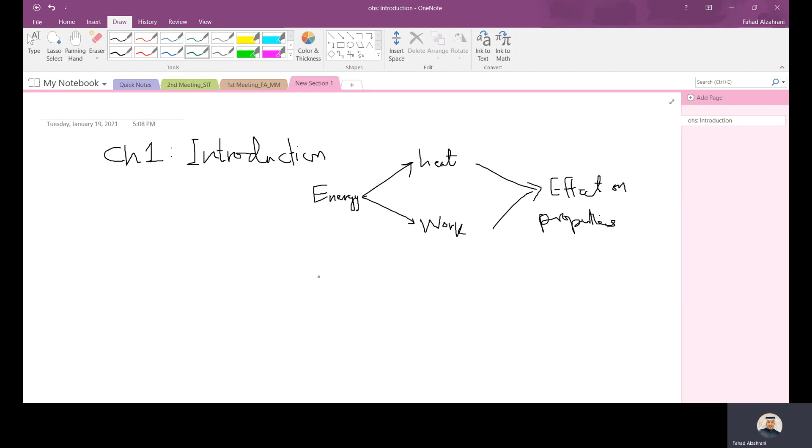Today we'll talk about a few concepts that are also important in thermodynamics. If you remember the example of the hot coffee we talked about before, let's say I have this coffee, and let's say it's hot.

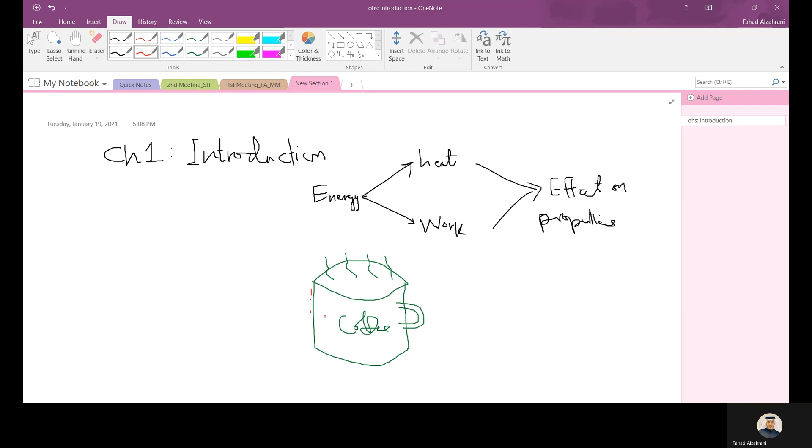Let's say I'm interested in understanding how the heat transfers from the coffee to the surrounding. I want to understand how the properties of the coffee change from state 1 to state 2, or from one point to the other point. So this coffee, in this case, is what we call my system.

A system is basically whatever you are interested in to study. I'm interested in the coffee, so this is my system. But what is the thing outside the coffee, away from the coffee? Let's assume this coffee is hot at 80 degrees Celsius, and outside, the ambient temperature here is 25 degrees Celsius. So what do we call this?

Outside the system, this is what we call the surrounding. This is the other concept in this case.

What separates the surrounding from the system, there is a line that separates the system from the surrounding. This line, or in this case the dashed lines, is what we call the system boundary. So the boundary is what separates the system from its surrounding.

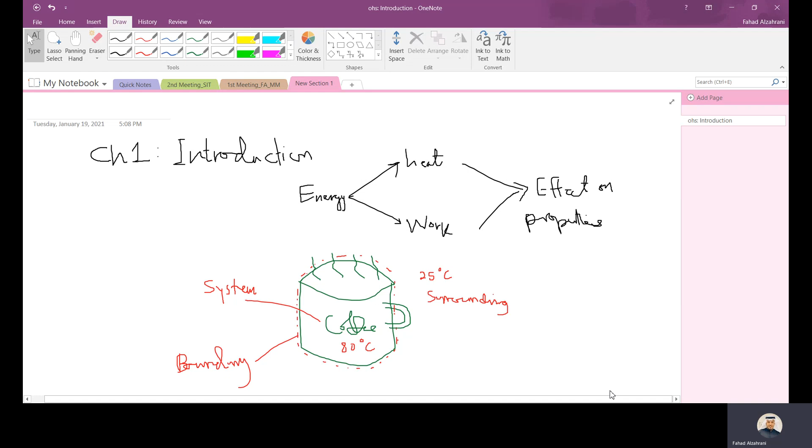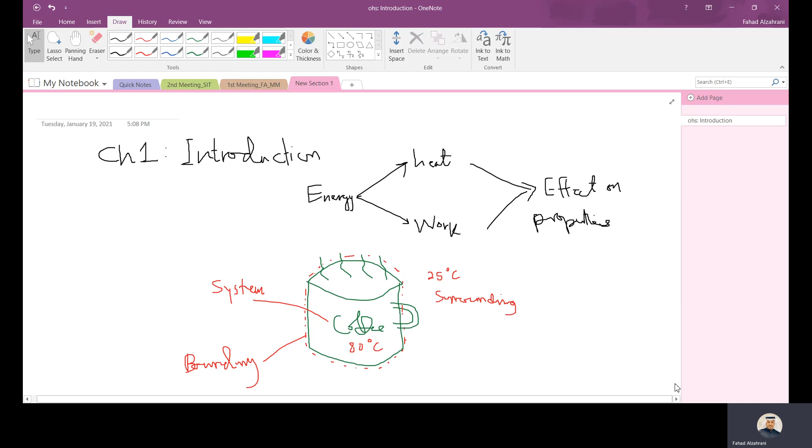The other concept is the type of system. If you notice here, the mass of the coffee is fixed.

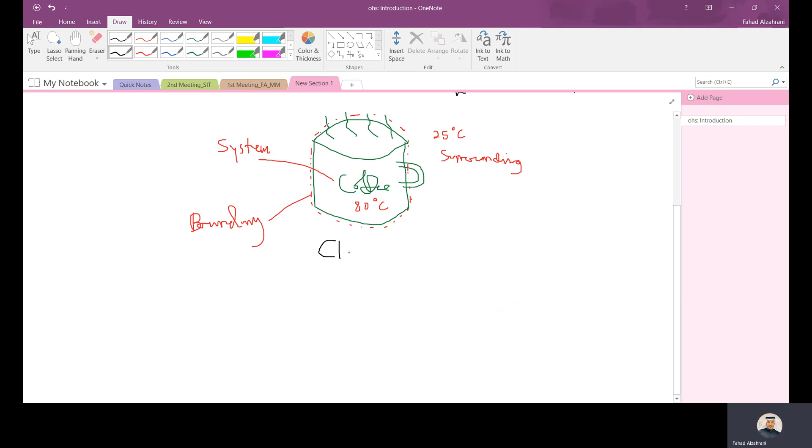I have coffee inside the cup, and this cup's dimension is fixed, and the mass of the coffee is fixed, and there is energy transfer by heat. So this fixed mass system is what we call a closed system.

Another name for it is control mass. Control mass means the mass is fixed, is controlled, it's not changing. So the mass of the system is not changing through the process.

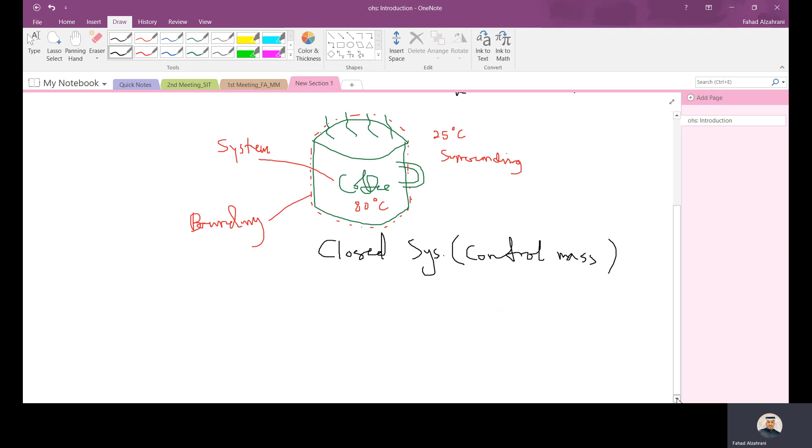Since we have a closed system, on the other side we have another type of system, which we call an open system. So what is an example of an open system?

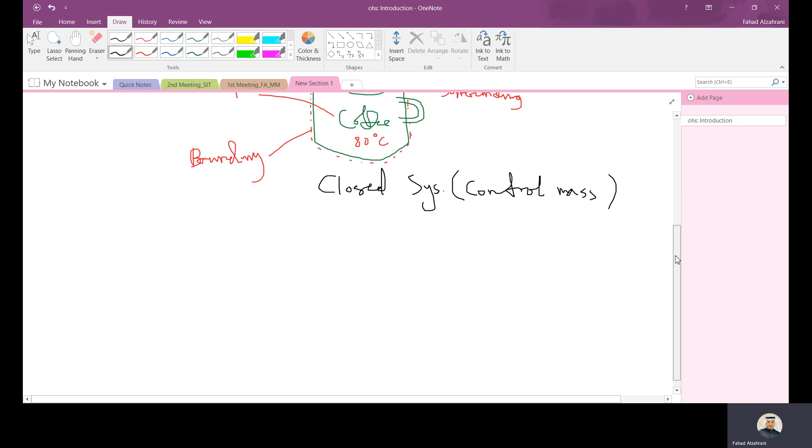Imagine I have a water pump, like the dynamo you all know at home. It takes water from the reservoir, from the tank, and pushes it to the top of the house. This is called a water pump.

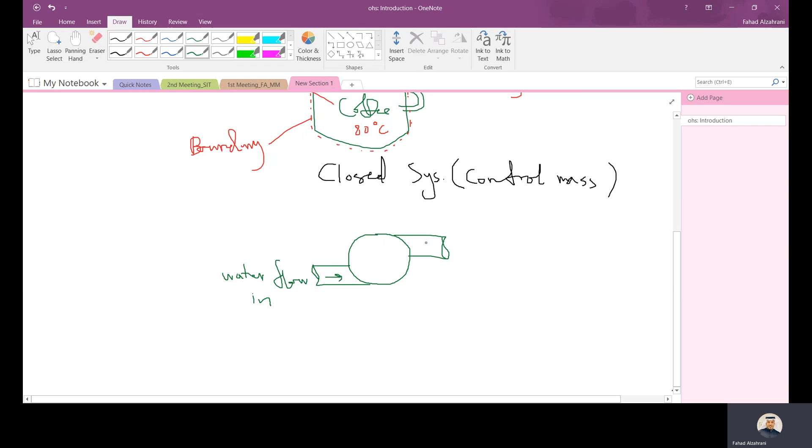It takes water from the inlet, so this is water flow in, and this is water flow out.

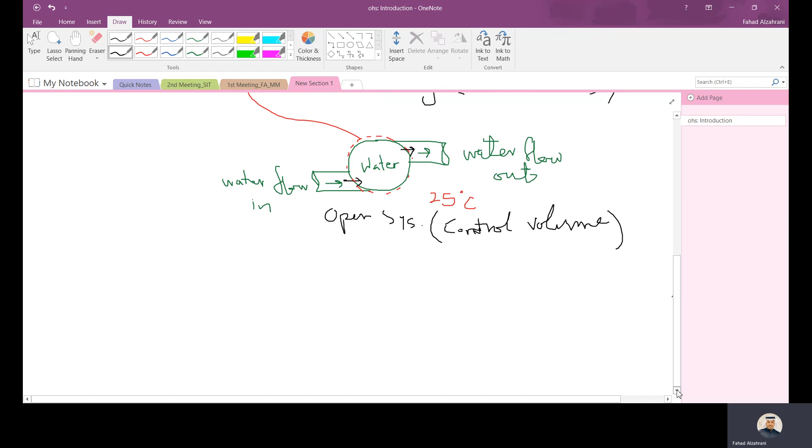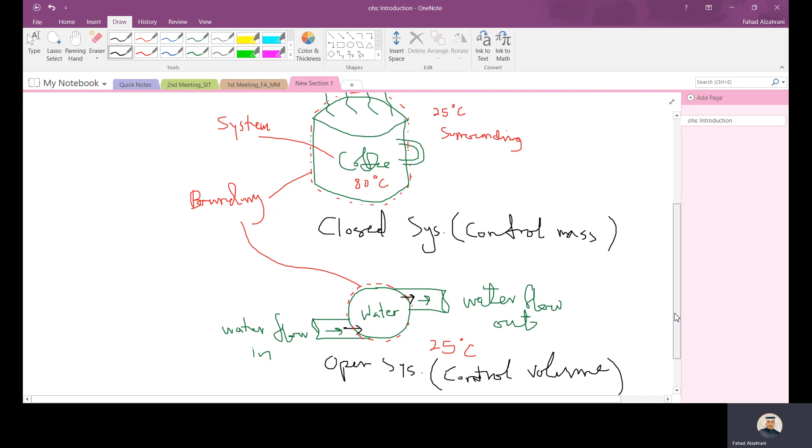So what did we learn so far? We learned what is a system, what is a surrounding, what is a boundary. We learned that there are two different types of system: we have a closed system, called control mass, where the mass does not cross the system boundary, and we have an open system, called control volume, where the mass crosses the system boundary.

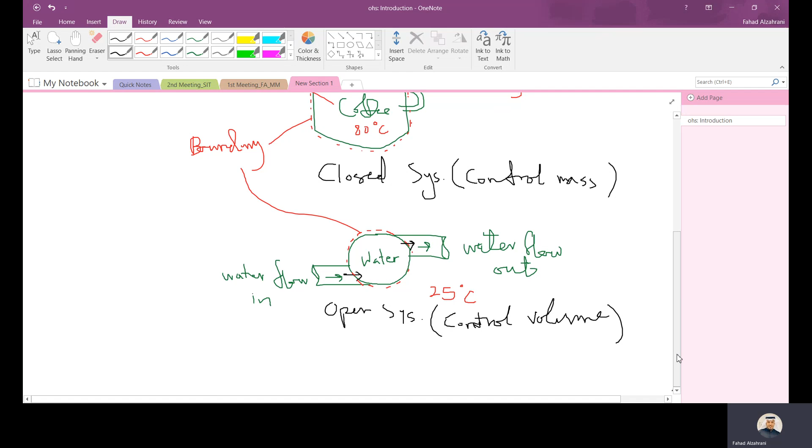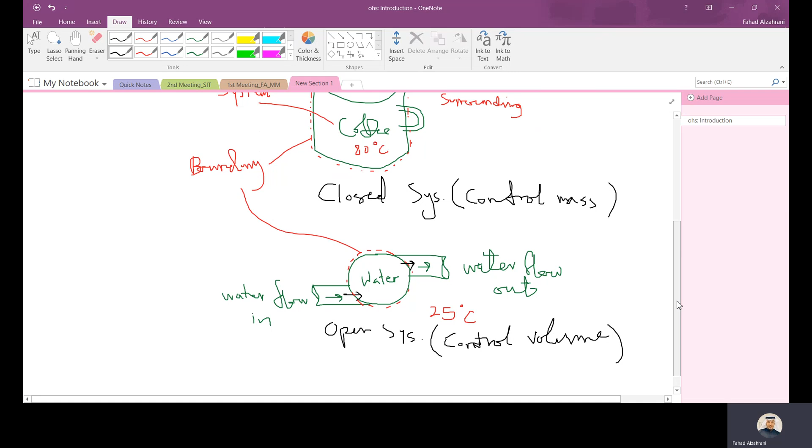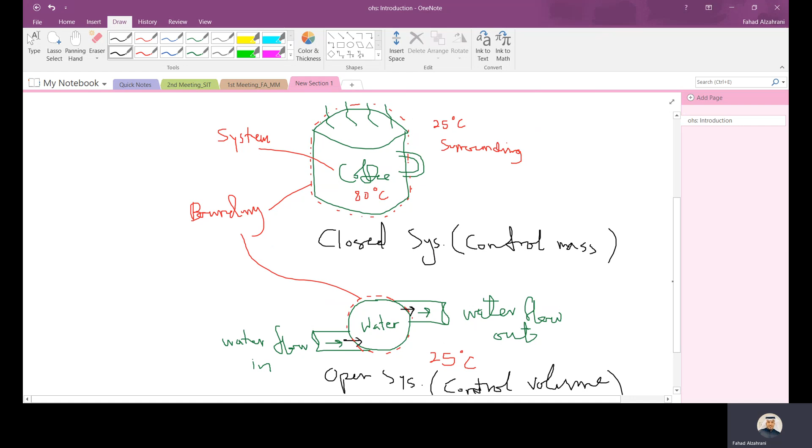Similarly to the system, we also have different types of boundary. If you notice, in these two examples, my boundary here - the dimensions or volume of the system itself has certain dimensions, and if we draw the system boundary, we notice that it is not changing. So the system boundary is not changing. However, we could have cases or applications where the boundary itself is a moving boundary.

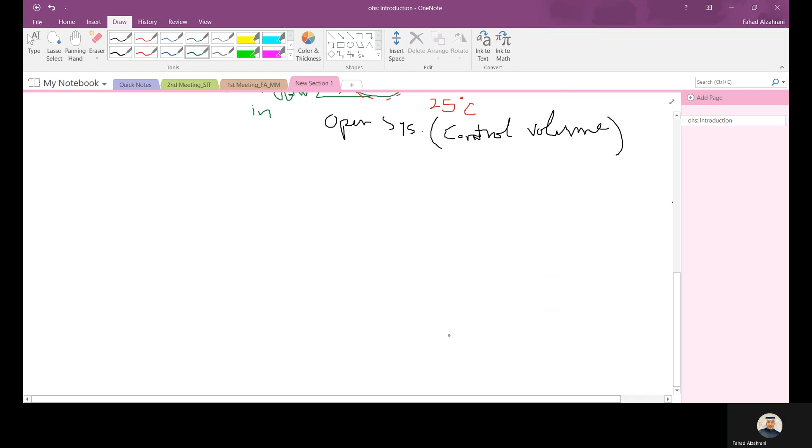So in the first two examples, we have a fixed boundary. In this example now I will talk about a moving boundary. What is a moving boundary? Let's assume I have this cylinder, like this - you know what a cylinder is. And assume I have a certain liquid inside, or gas, or whatever - here I have a substance inside.

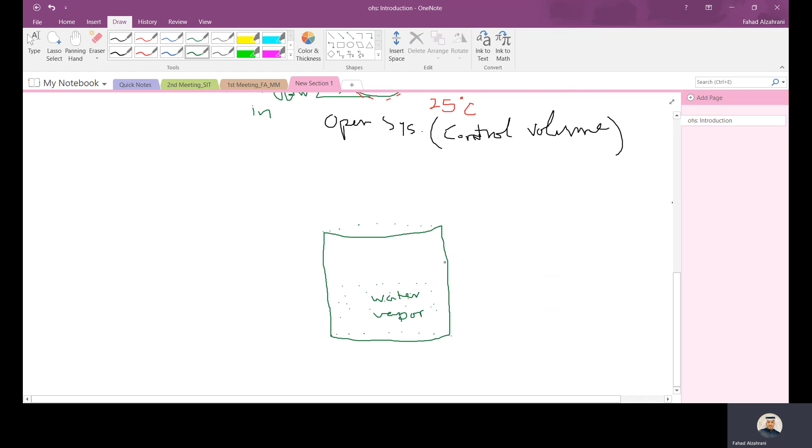And then, let's say, water vapor - let's say we have water, water vapor. So I have water vapor inside. Then I bring in what I call a piston.

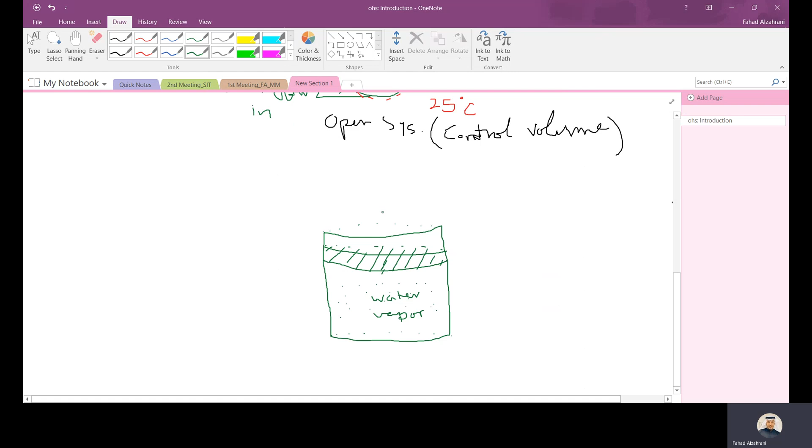Okay, I have this disc, and I bring this piston. Something like this, and this piston maybe also like this. Let's actually draw it like this.

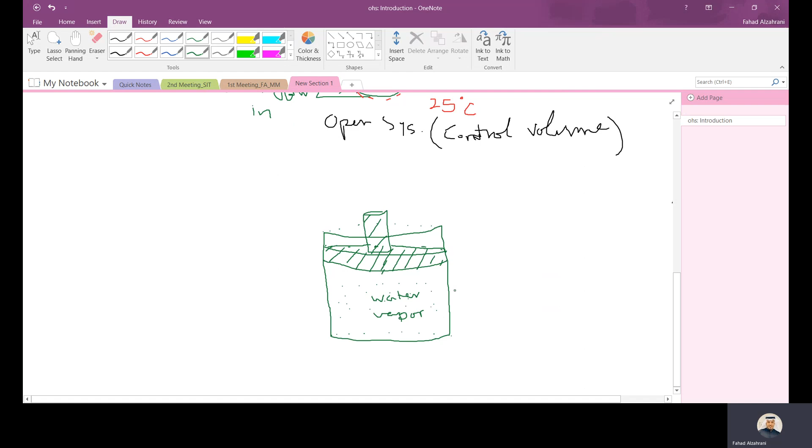Hopefully this is clear. So I now apply force using this on the water vapor so that the volume of the vapor changes, and the pressure changes, maybe the temperature changes. So let's assume I am interested in studying how the properties of this water vapor change from the initial state to the final state.

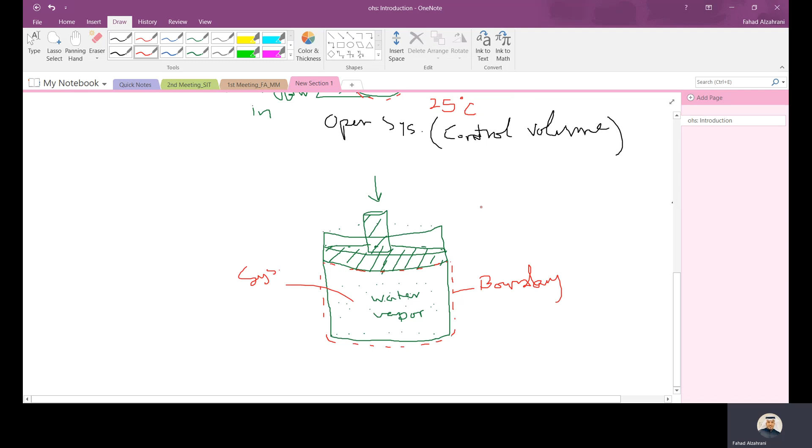So if I draw my system boundary, what I will do is say this is the vapor that I am interested in to study. This is my system, something like this. I'm interested to study my water vapor, how it changes behavior and how it behaves. So this is my boundary now, and this is my system, and outside I also have the surrounding.

So if you notice here, let's say in the initial state, this is the location of the piston. So what happened to the system boundary? Maybe I can change color here. So the new system boundary, the final system boundary, is something like this. Boundary.

So what do you notice, ya shabab, here? We notice that the system boundary, or the boundary in this case, moved. So the boundary was not fixed. We call this a moving boundary.

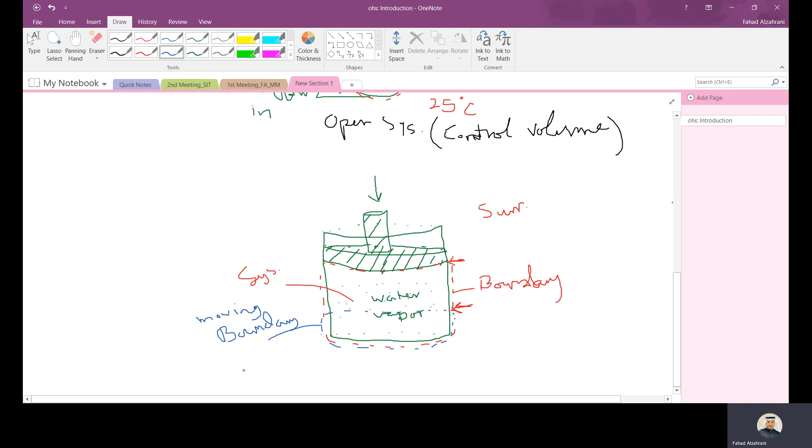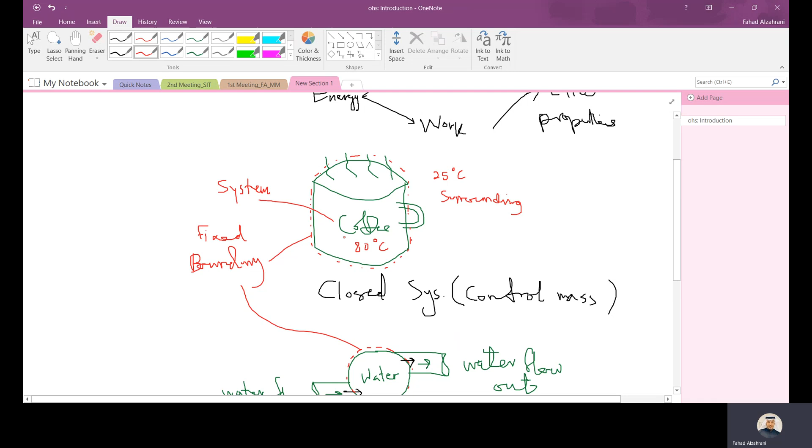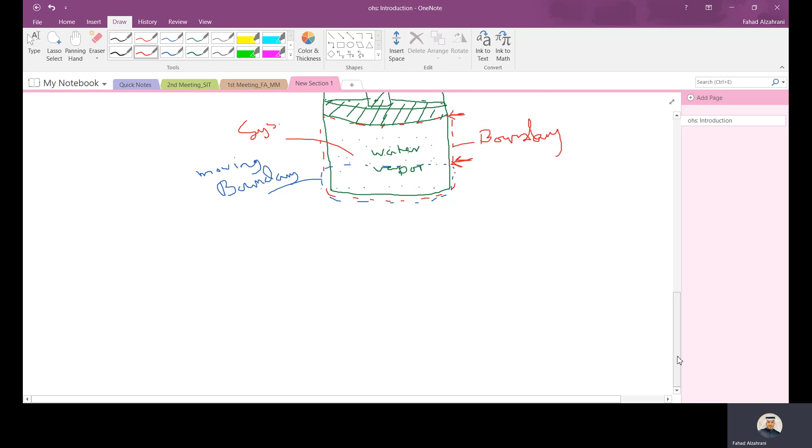In the previous example, ya shabab, this is what? This is a fixed boundary, because this coffee, the dimensions of the cup are not changing, the dimensions of the water pump are not changing. In this case, this is a fixed boundary. In my case here, in this piston cylinder arrangement, I have a moving boundary.

So this is the other important concept you should understand. And this piston cylinder arrangement, ya shabab, we learn it a lot, inshallah, we'll study it a lot. There are a lot of examples we will have using this type of system.

One of you could ask: how do I select my system boundary? Because now it's important to select your system boundary. For example here, when I selected for this piston cylinder arrangement, I'm interested to study the water vapor, right? How does it change? Why didn't I choose the water vapor including, for example, the piston itself? What would change if I included other things in my system? Maybe if I include this piston, then I need to consider the weight of this piston and how it applies when I do a force balance, like you used to do in physics.

So in the diagram, maybe I'll include the weight of the piston. Maybe if I don't include it in my system, then I don't have to do that. So what decides the selection of the system boundary? This is what you might be wondering.

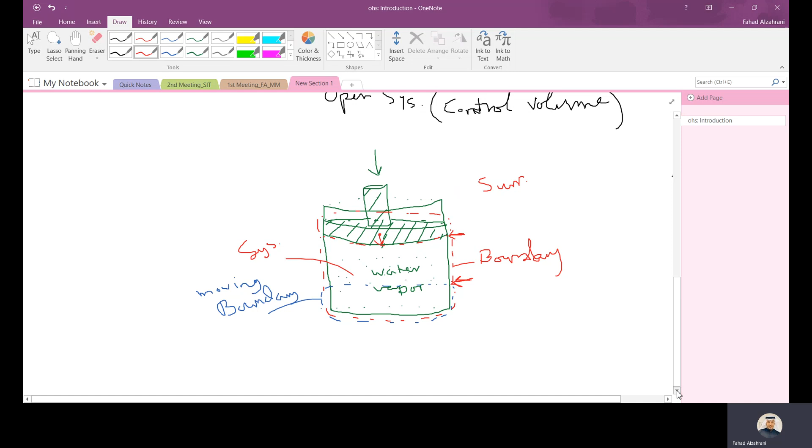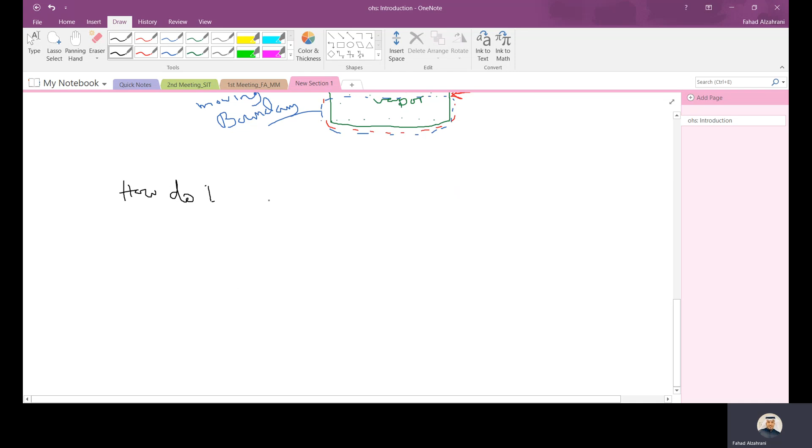So to answer this question, the question is, how do I select my boundary?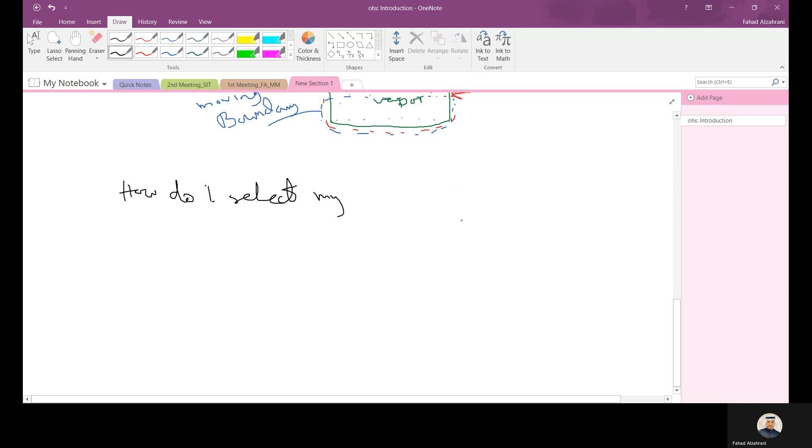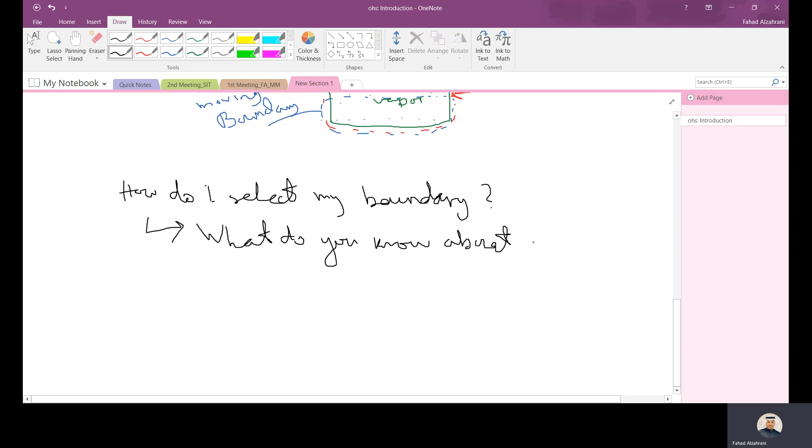Okay, how do I select my boundary? To answer this question, ya shabab, we need to pay attention to a few things. The first thing is, what do you know about the system, and what information is given for your system. So you should ask what is known, what do you know about your system, especially at the boundary you are selecting.

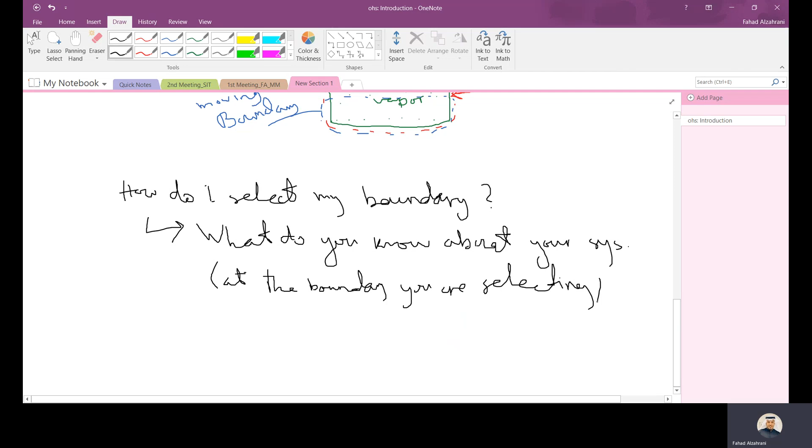To clarify this, let's go back to this example of the piston cylinder. I said before, why didn't I include the piston? Imagine I have the system and I have information given, but I don't have any information about the weight of the piston, the dimensions maybe, whatever, or the area. I don't know this information. So is it reasonable to include or not include the piston in this case? The reasonable answer is no, I should not include it in my system. So I select my boundary where the piston is outside my system.

So this is important. You need to look into what you know about the system, especially at the boundary you are selecting. Sometimes the best way to go about this is to select your system boundary where you have the most information given at the boundary and at the system. So this is very important. This is the first point.

The second point, you need to tell yourself what is the objective of the study, what is the objective of your analysis.

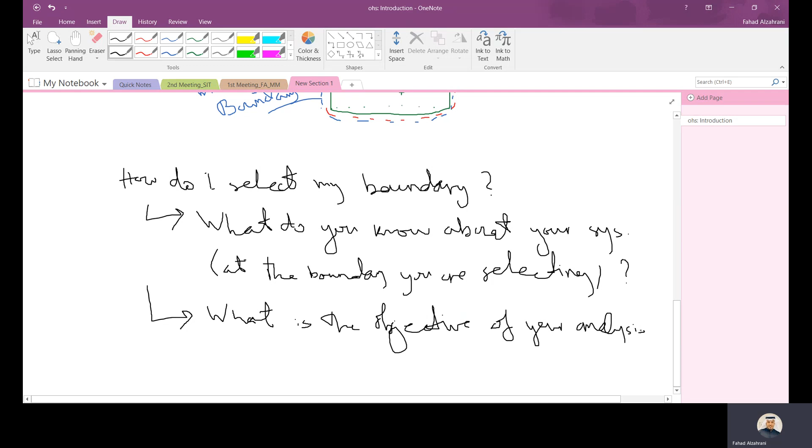Okay, so you want to do certain analysis. Let's say my objective is to study how the weight of the piston affects my water vapor. This is my objective, just as an example.

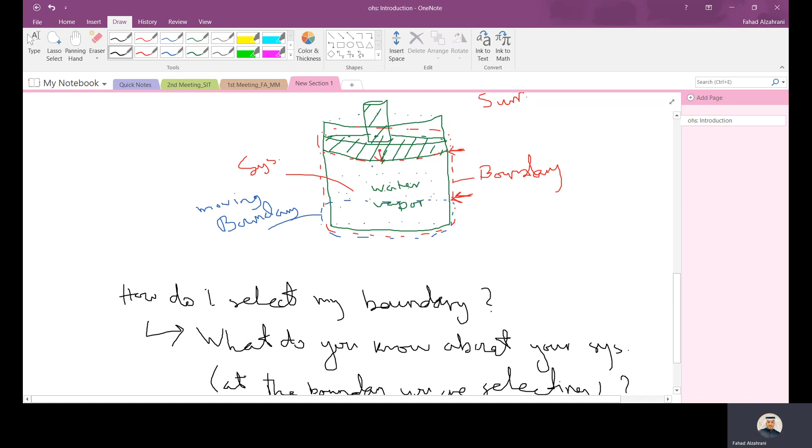The reasonable selection is I will include both the piston and the water vapor, because my objective is to study the effect of the piston weight on the volume of the water vapor. However, someone else says, no, I want to see how the atmospheric pressure affects things, with negligible piston weight. How does the atmospheric pressure affect the volume of the water vapor? In this case, maybe I don't need to include the piston. So it depends on your objective.

So in summary, in order to select your boundary, the best way is to select your boundary where you have the most information given. Especially look at the boundary you are selecting, and what information is given at that boundary. The second point is you need to select your system boundary so that it can serve best your objective of the analysis. These are the two important points you should consider when selecting your system boundary.

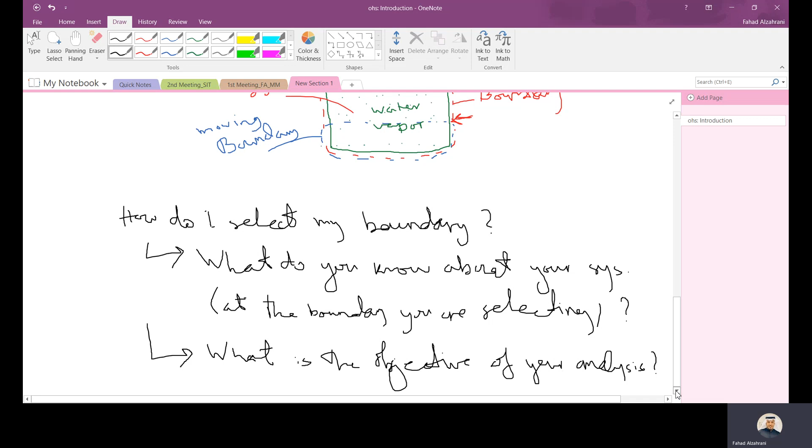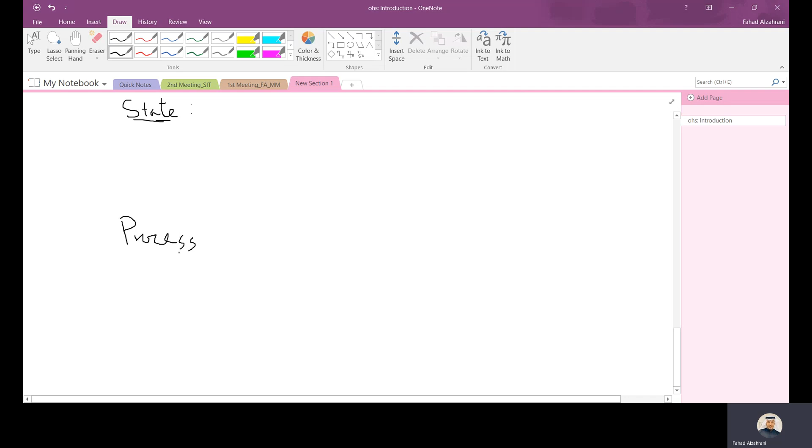So here, let's look into property. So we want to define what is a property. Also, we want to define what is a state. I slightly mentioned state while discussing, and also I want to define what is a process.

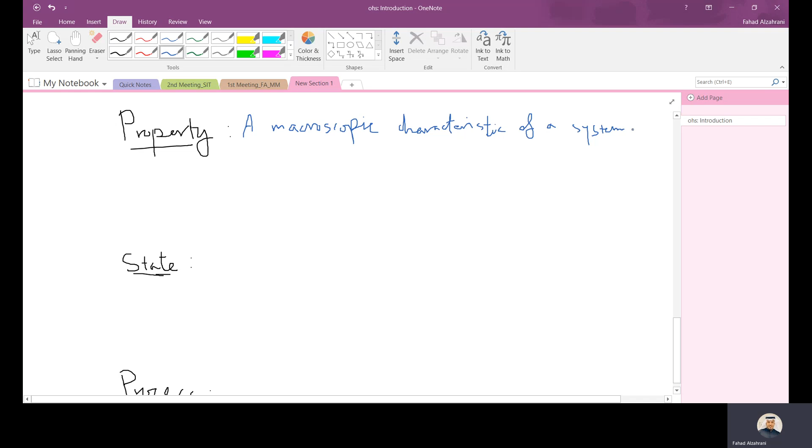So a property, what is a property? A property in a simple term is a characteristic of a system. I will give it a name, a macroscopic characteristic of a system. Macroscopic in this case means it's overall, a general or average characteristic of a system. Examples, for example.

So what is a macroscopic characteristic of a system? We have mass, for example. Mass is a characteristic of a system, it describes the weight of the system. Another example is temperature, another macroscopic characteristic. So let's say when you say the weather today, the climate is 20 degrees Celsius, the ambient is 20 degrees, you are describing the average temperature of the atmosphere. Also volume is another property, and so on.

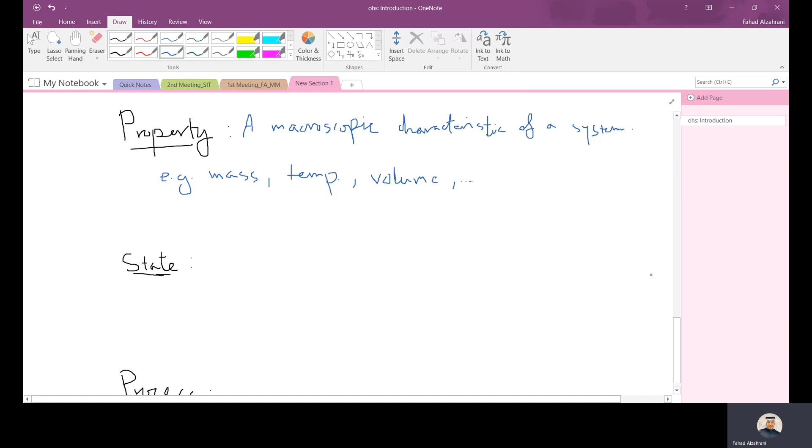What do you notice about these properties? Does it depend on the process? If you have a system going through a process, let's say in the previous example, I have water vapor and I'm trying to compress this water vapor. So if I don't compress it or I compress it, it doesn't matter, the water vapor will still have these properties. Before I compress, the water vapor has a mass, volume, temperature, pressure, etc. When it goes through a process, when I compress it, still during compression you have mass, volume.

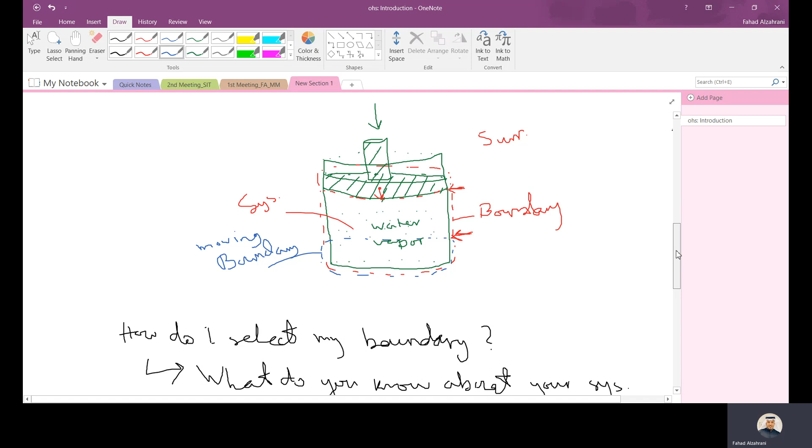It might be different from the initial one, but in general these characteristics always describe the system independent of the process. It does not matter what type of process the system goes through, these characteristics or properties always describe that system at each moment in time.

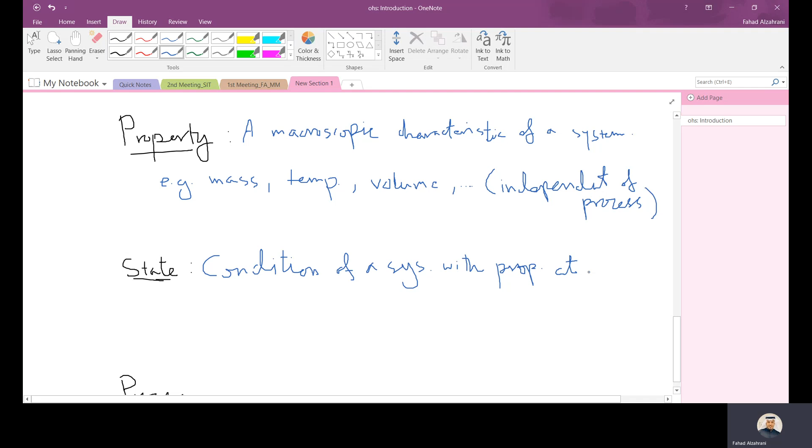The second concept I want to describe here is a state. So based on the previous discussion, what is a state? When I tell you initial state, final state, state 1, state 2, state 3, maybe a system is going through multiple states. So basically a state is the condition of a system with properties at a given time.

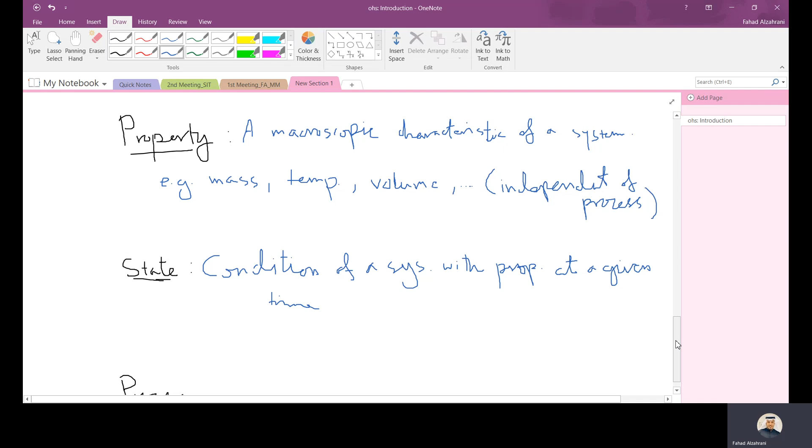Sorry about the writing. So we talked about what is a property - characteristics, macroscopic characteristics of a system like mass, temperature, volume, etc. So when the system is at a certain state, when I say initially the system is at temperature T1, pressure P1, volume V1, for example, this is a state.

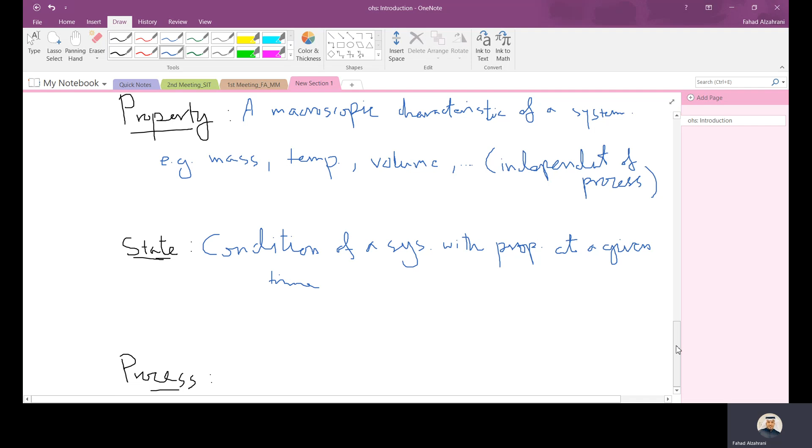This is the initial state that the system was described by its properties. Then it goes through a process, then it reaches a new state. Now the new state has different properties than the previous state. So the state gives you the condition of the system with the properties at that moment.

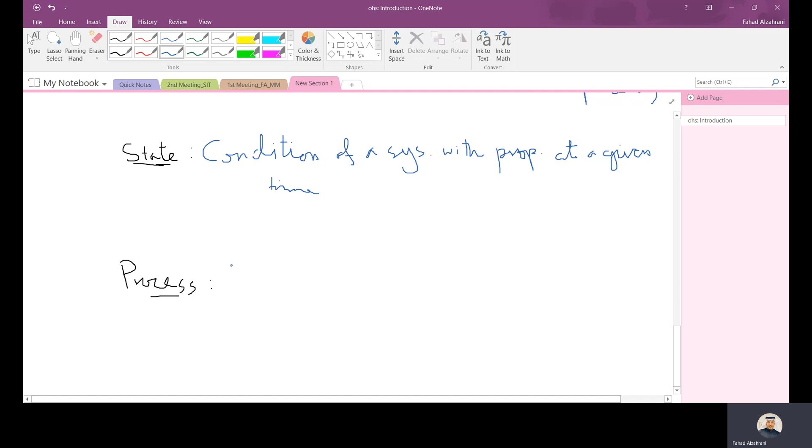Then based on this, what is a process? If we describe it in a simple term, process is basically transformation from one state to another. So the process is transformation from one state to another.

What type of process do we have? So mainly we have two types of processes.

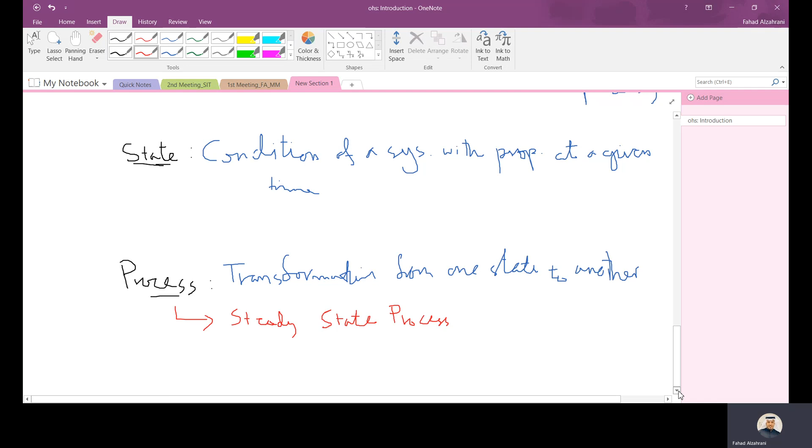We have what we call steady state process, and the other type is what we call unsteady or transient, unsteady state process. Let's call this SS, and let's call this US.

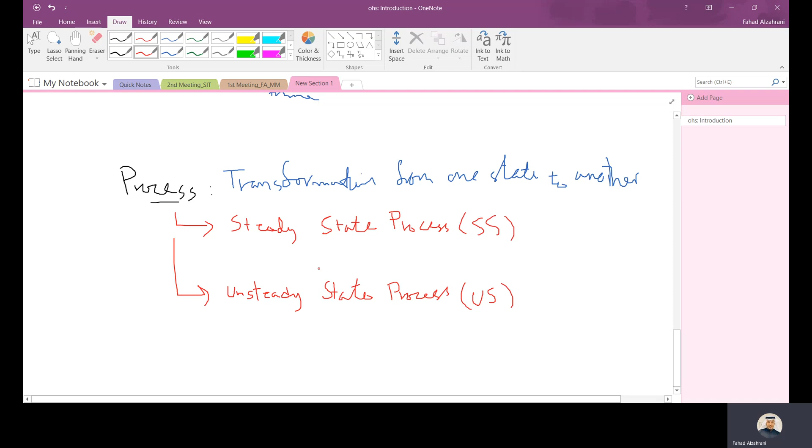From the name, steady means fixed or constant. So if we have this process, it's like constant properties with time. So during the process itself, the properties are not changing.

How about the unsteady? The unsteady is clear now, means changing properties with time. So unsteady is the opposite - during the process, the properties are changing with time.

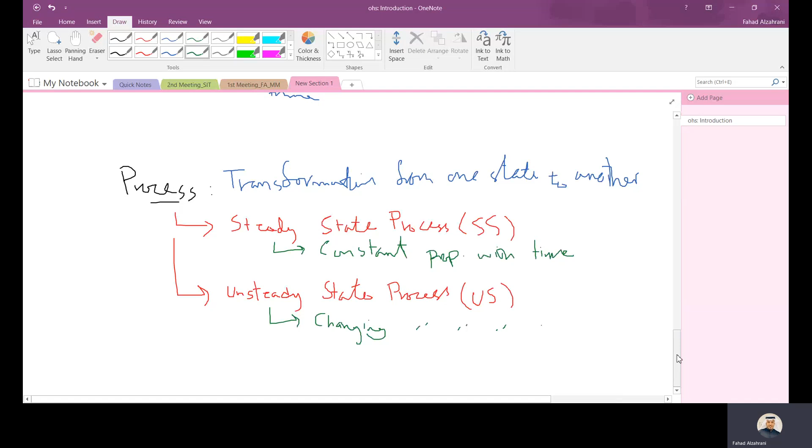An example for this: the water pump. This is an open system. I'm interested to study the water inside the pump. If the mass flow out is more than the mass flow in, I have mass reducing in the control volume itself - this is unsteady state process.

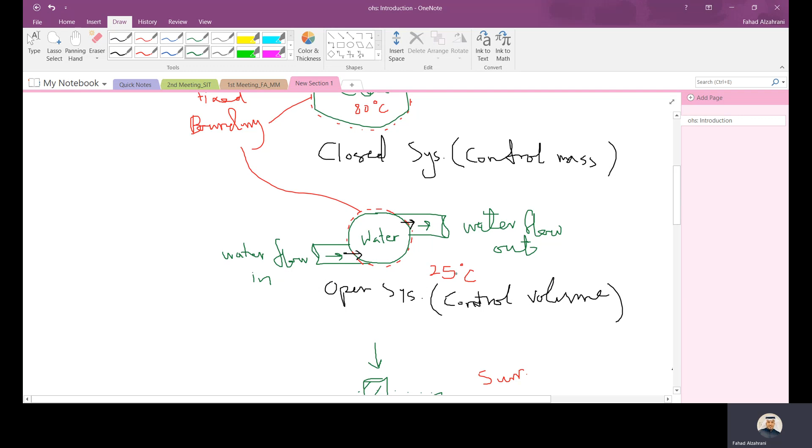However, if the mass in equals the mass out, you will notice that the mass within the control volume - this is still an open system, still mass crossing the system boundary - but the mass inside is not changing, is almost constant. It doesn't mean the system is closed, it means mass in equals mass out makes the mass inside almost not changing. In this case, I call this a steady state process or steady state flow. I hope the difference is clear now between a steady state process and unsteady state process.

Let's see if there is anything more we talk about here. All right, I think that's all what I wanted to discuss with you today, inshallah.

Next class we'll talk about the different types of properties, and this is important - you have different types of properties, we need to focus on that more. And then we'll talk about units and the importance of units in this course, and the importance of unit conversion.

Because a lot of students, and I'm telling you from now, mostly make mistakes in the units. Sometimes you need to change the pressure units, the energy units, etc., so it's important to understand how to do unit conversion. Then we'll talk about some of the main properties relevant for us in this course, which is volume, pressure, and temperature - we'll talk about each of them briefly and conclude this chapter, inshallah.